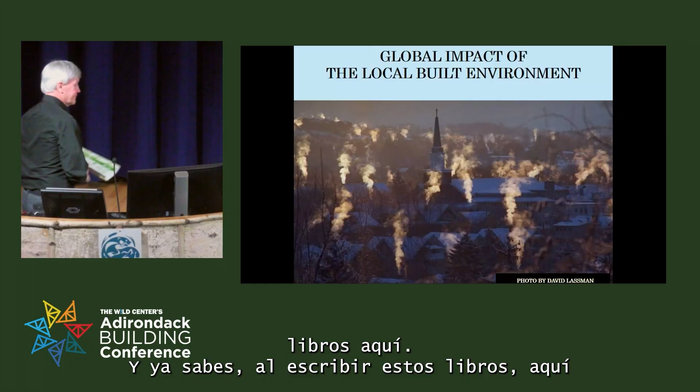So we're going to talk about these 2 books here, and they're contained right in these books. Here's the 2020 code. Here's the new one, the 2025 code, and it lives inside the book that Art's going to talk about later, in chapter 11.

So this is a picture of where our office sits up on top of this hill. If you look down here, if you think about it for a minute, our buildings really are alive, and they do create a lot of emissions, right? I think Chris just proved that when I looked at the slide up there, how many houses are still on either oil, gas, or in some cases coal, because there's a coal-fired power plant in the far back right of that picture.

So if you look at this and start thinking about what really happened five decades ago, it was a quiet marine biologist named Rachel Carson. When she published her book, she took on the chemical industry and parts of our government. Silent Spring, but she won. And that was the start of everything we need to know about energy right now.

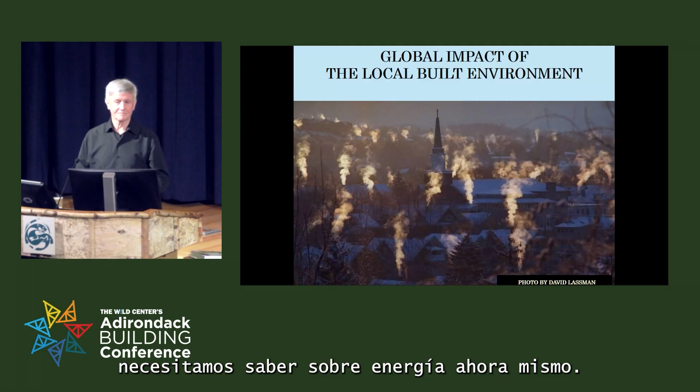And it actually was the first code, the energy code. Our first energy code was ASHRAE 1975, and it was created because of that war that got started way back then. So we fast forward and we're 50% better now. But our goal in New York State and the country right now in that glide path is actually zero by 2050, right? So this is getting pretty aggressive here.

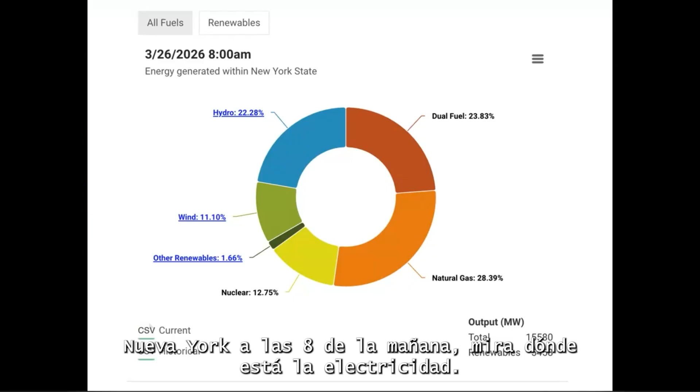This morning I went to the New York Independent System Operator's website, and this is the power mix where we're getting energy in New York State right now. This is all fuels in New York State as of 8 a.m. this morning. See where hydro is.

Hydro's been there for about, I would say, the last 20 years at about 20%. It was actually one of the big things when Andrew Cuomo would stand up and say we have the best renewable energy in the nation, but it was all because of the hydro, and we know where the hydro comes from, right?

Well, if you look at the renewable side, hydro's at 64%. Yesterday morning, it was 20% less than that. So you can see what the oil and gas prices are doing to us right now. We're coming to rely and pull more of our energy in New York State with basically hydro, and you can see where wind actually jumped up a lot.

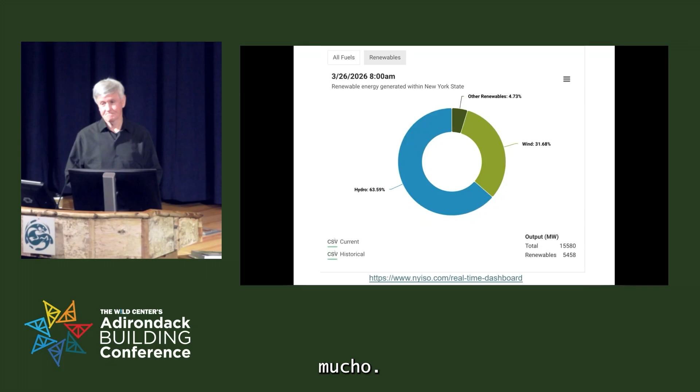That's strictly New York State. Well, we are getting hydro from - you guys know that the line's running down the Hudson River right now into New York City, right? That's in play. That's the power coming from Canada.

Good question. Geothermal, and I believe nuclear was already up there, right? Nuclear is in there. Yeah, there it is right there, 12.75.

So on December 16th of 2025, that's not that long ago, there was a unanimous vote that accepted the New York State Energy Plan as an all-of-the-above approach. So the New York Independent System Operator slide that I showed you is probably going to be what we're going to be seeing for quite a while now.

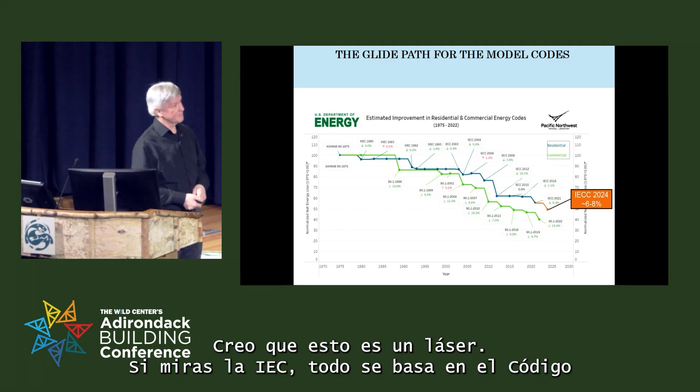This is the same slide that Chris showed, but I want to make important - I think this is a laser - you look at the IECC, it's all based on the International Energy Conservation Code of 2024. If you look at that, you can say, okay, we've only reduced our energy use in this code by 6 to 8%. Is that true?

And this is where we're starting to hear these things over and over again. But in New York State, we do things differently, right? Andrew Cuomo, again, way back in 2006, skipped to 2009.

We hit that code, and then we went right to the 2015 code. That was a 20% energy reduction in a simple code change. So where are we now? If you look at the graph, starting with the dark line, see the 2015 code to the 2018 code, and now we just adopted the 2024 code. So we skipped the code cycle of 2021. If you add those numbers together, we're much closer to about 17 to 19% energy reduction. That's where we are right here today.

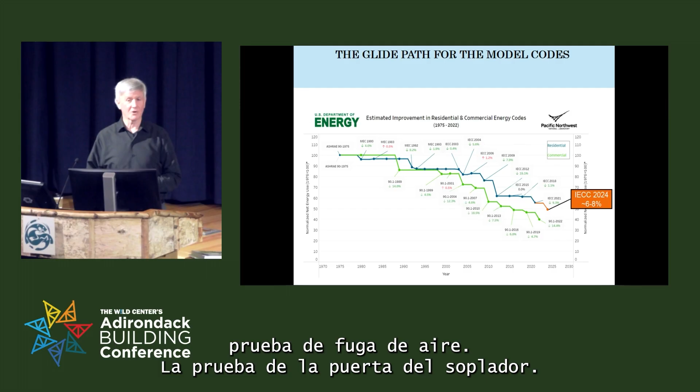And that's important. This is the first code cycle ever that's introduced two more performance tests. 2015 was the first ever code to introduce the air leakage test, the blower door test. How many are familiar with the blower door test in here? So everyone's doing them for your certificate of occupancy? Because it's required, right? It's mandatory, it's not should, it's shall.

All right, so when we start to look at these codes, we start to see what's really happening, right? There was no grace period, again, no transition period. We immediately went on December 31st of 2025. At that last hour of last year, any permit that was pulled after that had to go into the new code.

This is what the code books look like. It's a common misconception that everything is included in the code books and online, because it's not. The Uniform Code is actually contained in 19 NYCRR parts 1220 to 1227. And we need to know that, because it's really the prescriptive stuff embedded in the website that tells us a lot of stuff that the code books aren't telling us. It's telling us about not just what we have to do, but why we have to do it and how the code was created and what we need to follow.

And before you look at any code book or any online forums, you have to go to that website, because things change, right? When they make a decision to change something, maybe the code wasn't written properly or something else was different, or they decided to upgrade it or downgrade it, you have to go with what's going on right then and there, and match it up with when that permit was pulled.

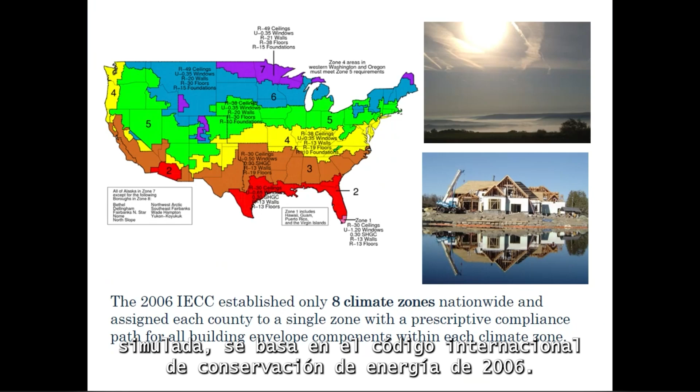So in 2006, that's an important date, because we're going to talk a little bit. We're 2 hours here, so I'm going to go back and forth on some of this stuff. But the referenced home that's buried in the code, whether it's the energy rating index or the simulated performance path, is based on 2006 International Energy Conservation Code. Because how do humidifiers work? They blow air across little bodies of water, right? In our furnace or our air handling systems. That's all they do. So what we decide to put into our homes for insulation, building envelope, and air leakage...

Air barriers are pretty different from when we build up on the top of a hill in Manlius, New York, or on the shores of Skaneateles Lake. Hygroscopic building materials are not good when you're sitting right next to the largest humidifier in New York State, right?

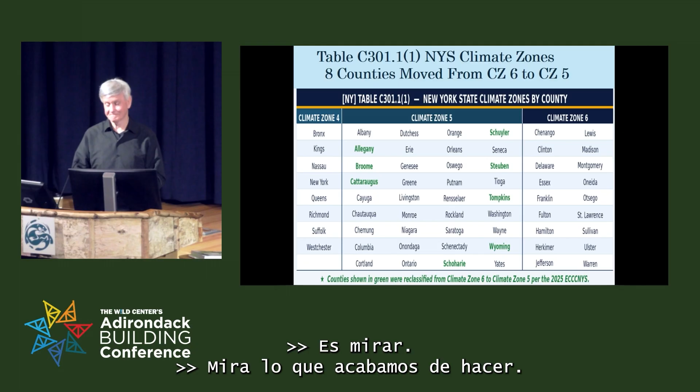So this is what New York State looks like. You know, the climate zones haven't changed that much, or have they? Because look what we just did. We just moved 8 counties out of Climate Zone 6 into Climate Zone 5. 8 different counties. And all that movement is based on heating degree days. Nothing else. That's all it measures. Heating degree days and cooling degree days. Imagine that. It has nothing to do about the wind loads that Art is going to talk about or anything else. We just slid 8 different counties into Climate Zone 5.

And that's going to get pretty important, because in Climate Zone 6 this year, it's the first time ever an HRV or an ERV is required.

If you're building in climate zone 6, you have to have a heat recovery ventilator or an energy recovery ventilator. And it has to be set to an ASHRAE standard, ASHRAE 62.2, 2018. And that's going to change. That's the standard referenced in the code book that will change outside of the code book, but it will not change until the code catches up to it.

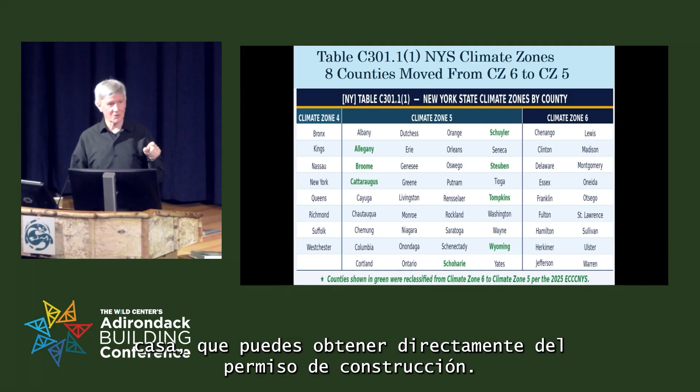That's important to know. When we talk about ASHRAE 62, it's a simple formula: 0.03 times the conditioned area of the home, which you can get right off the building permit, plus the number of bedrooms in the house plus 1. So what does all that mean? Why do they say number of bedrooms plus 1? It means the ASHRAE standard considers that 2 people are in the master bedroom and every other bedroom has 1 person in it.

This year alone, for the first time, the code cycle decided that 5,000 square feet was a big house. The code references ASHRAE 62.2, and there's a chart in the code book so you can look up the number of bedrooms and square footage, and it'll tell you how many CFMs you have to introduce. Mandatory introduce, not should, it's a shall. How often in these big 5,000 square foot houses do you see 6 people living in that house? How often are they actually in the house up here in the Adirondacks? Not often. So we have a code telling us what the air changes have to be, mechanically ventilated, based on a standard created 50 or 60 years ago, but it doesn't necessarily do justice to the house.

So I still work with a hammer, I don't work with a computer, so I'll be the first to tell you, our houses do not live inside computer models. They don't. And so when they start to underperform, this retro-commissioning that a lot of us do becomes critical, because you got to understand how the house is actually being used. It can't be based on a standard.

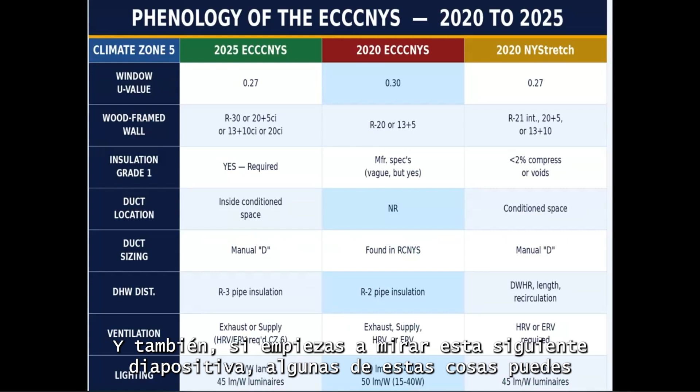And it also, if you start to look at this next slide here, some of this stuff you can get online, so it's not a big deal. But if you start to look at this, the 2024 International Energy Conservation Code really took everything from climate zone 6 and put it in climate zones 4, 5, and 6. It is the first time ever in a code that I'm aware of where a metric went down.

And what metric is that? Can you guys see it up there? It's a big one. It's the ceilings. R49 across all 3 climate zones in New York State. What it used to be?

R60, right? So what do you think happened there that the code that's supposed to be on a glide path to net zero just made that change?

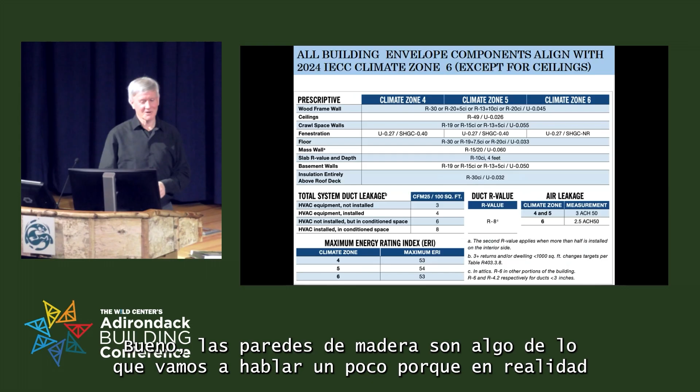Well, the wood framed walls are something we're going to talk about a little bit because it's actually wood framed walls and the windows are big things in the code. Josh and I get 2 to 3 calls a week on what are we going to do with the windows. We like to use Marvin Ultimate and they don't make a window that meets the intent of the code.

What do you do? Go to the ERI path. The backstop on the ERI path is like 0.4, not 0.27. You can get there if you start to manage and use the code to your benefit, right?

So the big thing here is that the R49, the reduction, was because the building scientists proved in a simple flow chart, XY axis, that after R49, the return on investment was 2 to 3%. The other thing you start seeing - we're going to talk a lot about duct leakage, because that's a massive change in the codes right now.

Okay, so here's the significant changes: framing and air barrier inspections. How many know what an air barrier is? Everyone knows what it is, right? Can you walk outside this building today to a new construction and identify the air barrier? Because I can't. I'm a builder and I put them in.

I'm also a HERS rater that have tested over 1,000 houses, probably thousands by now. And when I put an air leakage test in there and put my blower door in, that air barrier is not where it said it was on the print. Very rarely do I find it there.

Do you know where we get the most air leakage when we do our air leakage test with a blower door? We don't even have to do the forensics - the zonal pressure diagnostics where we can put a tube into the ceiling and find out if the attic space is connected to the house. Put it in the garage.

Where's your air barrier in the garage? Not Tyvek house wrap, right? It's the drywall, and it only has to be fire taped, right? And do we do as much air sealing in our garages as what we do in the rest of the house? Not even close, right?

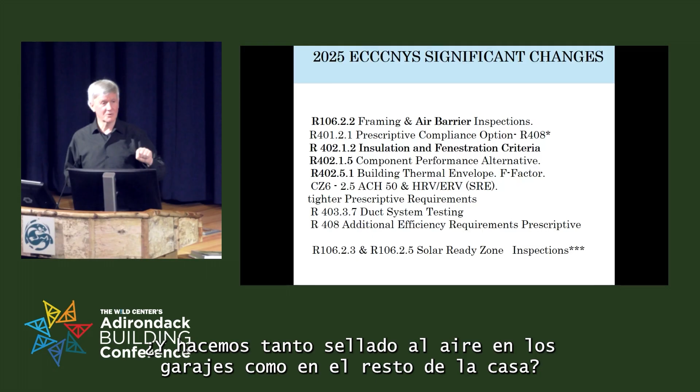And what do we put in our garages? Everything we don't want in the house, right? Cans of oil, cans of gas, our car, our lawnmower, old paint products, everything that's going to outgas with high VOCs that actually do react in the atmosphere and cause harm. Well, if the air barrier is broken in the garage, that's a bad thing. How do you inspect for an air barrier in a garage when all you got to look at is drywall?

You can't see around the base, where your mud sills hit your concrete blocks or concrete wall. So the next biggest area of leakage, it's not the ceiling, it's usually that perimeter of the base, where you have a wood product that hits a concrete product. Concrete doesn't move and the wood's moving, right?

We put this thin layer of foam down, and next thing you know, we're finding we're getting a lot of our air exchanged with exhaust-only ventilation. Or let's say someone turns a dryer on. Do you know a dryer exhausts 250 to 300 CFM per minute? That's a big exhaust every time we use our dryer.

We find that it comes underneath our decks, low to the ground. What do we find underneath our decks? Poor air quality. So the code is telling us that we have to do mechanical ventilation.

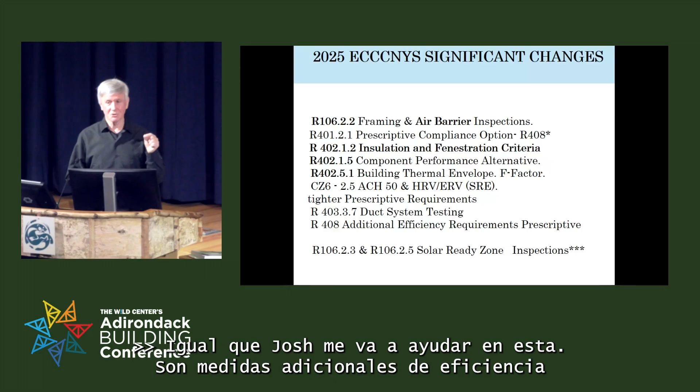Prescriptive compliance option - we're going to go into this one a lot, Josh is going to help me on this one. It's additional energy efficiency measures, brand new in the code. It's not on ResCheck - you have to manually enter and write it in on the ResCheck form and print it out. ResCheck can do a lot of things for us. And by the way, this code cycle came into play January 1st of 2026. ResCheck didn't even have a drop-down box till 3 weeks ago for the 2025 Energy Conservation Construction Code.

Who did those plan reviews? I have builders calling me up saying, hey, we checked the 2024 IECC and we got our permit. There's no way - they're not the same. They're not the same. But now we have the drop-down box, and there's a place for the architect or engineer, or whoever does the ResCheck for you, to write down those extra energy efficiency things.

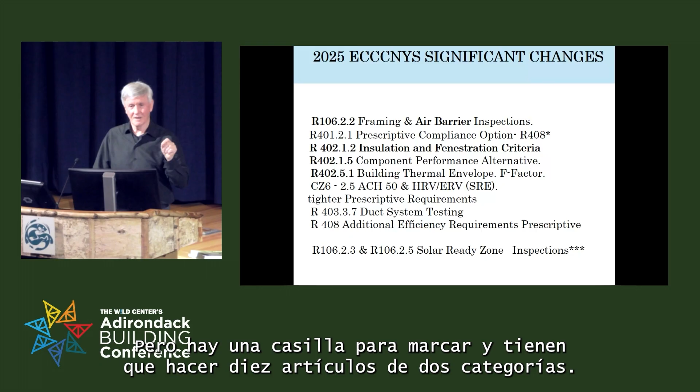But there's a checkbox for it, and they've got to do 10 items from 2 categories. And oh yeah, if your house is over 5,000 square feet, you've got to add 5 more energy efficiency points. So when you do that, think about it - if I was an architect, I'd come in at 4,999 square feet, right? Probably. It's a smart move for an architect to do that, to get his plans reviewed.

Insulation and fenestration criteria, that's changed - that's in the prescriptive part. The component performance alternative - imagine that, a brand new name in the code. How come? Why did they have to change the name in the code just to mess us all up? We thought we had it, right? We knew the charts, we knew our 402.1 and 1.3.

We knew it, but now they had to change it because for the first time in the code, they said - we always had a factor in there for concrete slabs, but it was always wrong. So now you have to include the F factor. That's the heat loss from the slab, and it's not just slabs on grade.

If you're going to use ResCheck, or the ERI path, or the simulated building performance path, or the prescriptive path, you have to account for the loss of heat in the slabs, because it's been proven over and over there's more heat loss there than you can imagine. There's a number you put in when it's less than 12 inches below the ground, like a walkout basement as it wraps around the house. If it's only 4 feet below grade, there's a correction factor, and if it's 8 feet below grade at the top of the house where the entry usually is, it's a different correction factor. The models do that for you, but if you're doing the prescriptive path a different way, you've got to do the math on that yourself.

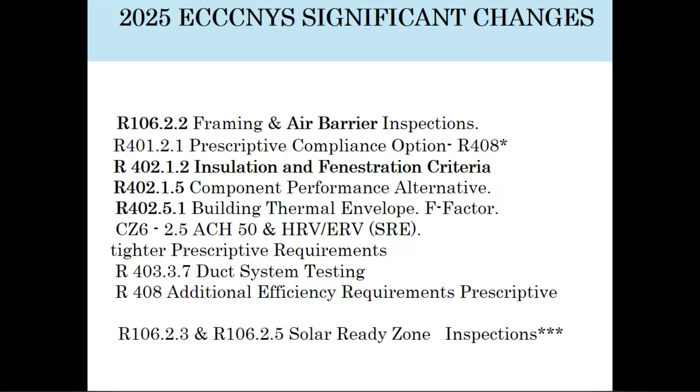But all those appendices were rooted out of the International Energy Conservation Code. There's like 7 of them that were built into the code, got passed, then on appeal were all taken out. What New York State and the 2024 IECC allowed is they put those appendices in the code book so that any state or municipality can yank them out and make them part of the code if they so choose. The only one New York State adopted was the RF one.

RF stands for residential fenestration, but the only reason it's there is because there's the chart for the F factor you have to use to put in your models. You have to measure the heat loss from your concrete slabs.

So here's the 3 pathways. This is actually on the exam when you take a plan reviewer test with ICC or whatever. There's 3 pathways for compliance. R401.2.1 prescriptive compliance option. There's 3 ways you can do it.

It's simple prescriptive. You have the U factor chart there, and the U factor for your assemblies and for your fenestration. You just do all that. You pass the code. Simply prescriptive.

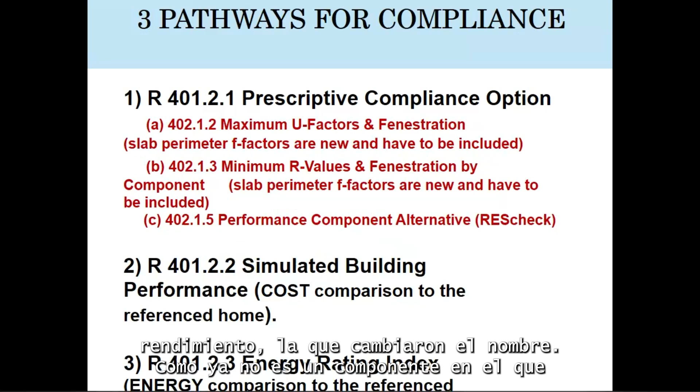There's section B there, minimum R values and fenestration by component. Same thing, all prescriptive. And C, the performance component alternative, the one they changed the name of, because no longer is it a component. They threw the F factor in, which is not a U value. They're not even close to being the same. You measure heat loss from a slab completely different than you measure through the glass or through a piece of insulation.

So if you start to think about this, they couldn't say it was a component, so they had to change it. They had to change the UA approach to the component alternative. And that's what's now in ResCheck. That's usually the most often used compliance path.

Then you have the simulated building performance. All it's doing is comparing the energy cost based on the reference home that lives inside a computer. And if you're better than what they are by a certain percentage, it's like 20%. So here you go.

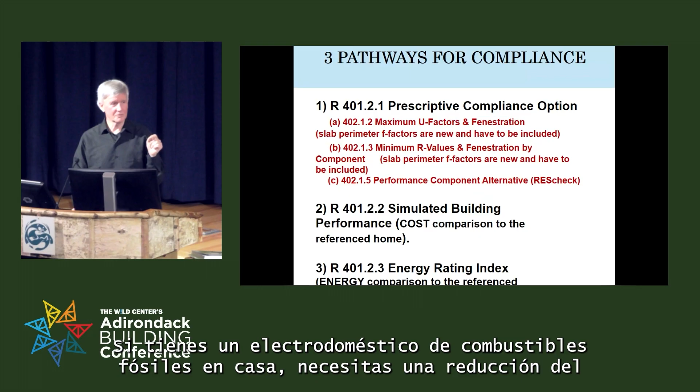Here's the code sneaking in electrification. If you have a fossil fuel appliance in your house, you have to have a 20% reduction. If you're all electric, let's say air source heat pumps or geothermal, it's only a 15% reduction. So they're sneaking it in probably about 5 or 6 places here that unless you read this code book quite a bit, you don't even know it exists, but it does exist.

So the simulated performance doesn't include lighting. It only includes your heating, cooling, and ventilating. That's all the costs they're measuring right now. And if you can beat that, you got it.

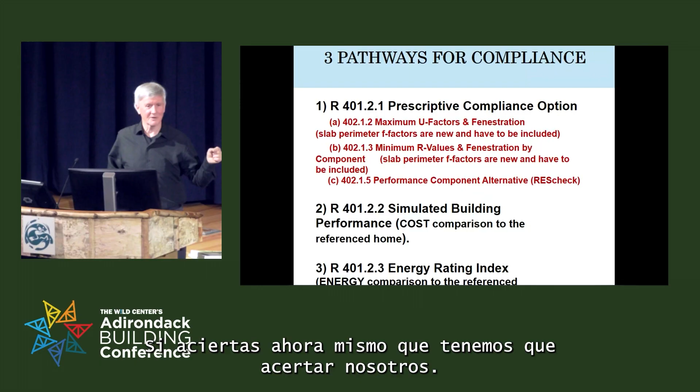I would say the most often one that is not used now is the energy rating index. We should have been using this for the past 20 years because 45L was that federal tax credit that gave you $2,000 if you hit the mark we have to hit right now. Builders didn't want to do it because you had to do all the other testing.

You had to do the air leakage test. Well, with the 2025 code, you've got to do the air leakage test. You had to do the duct leakage test. Well, 2025 code, you've got to do the duct leakage test. You had to do the mechanical ventilation test. Well, 2025 code, you've got to do the mechanical ventilation test.

We're there. The 45L tax credit sunsets in 3 months. It was a $2,000 federal tax credit. I have a friend in Wisconsin I used to go to a lot of these HERS Rater conferences with. He built 40 houses a year.

The tax credit, not a deduction, right? If he had a tax bill at the end of the year of $100,000, 40 houses times $2,000 is $80,000. He only owed $20,000. And still builders didn't do it because they didn't want to pay the cost for a HERS Rater.

Where'd that guy go? There he is back there. I can't impress enough that my son Josh is sitting here. He's building on Cazenovia Lake, a high-end house on Cazenovia Lake.

He calls in for an insulation inspection. He doesn't get a call back for 3 or 4 days. He wants to get the drywall up. Time is money - you've got a drywaller scheduled, you better use them, right? He hasn't even gotten a call back yet, so maybe he'll get an insulation inspection next week, right?

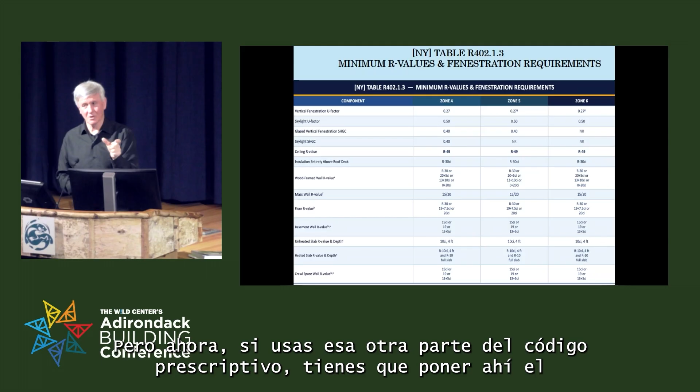Because in climate zone 5, we do have a solar heat gain coefficient of 0.40. So now you're talking to the window manufacturers that prescriptively say, I don't have a window, my highest end window, I'm just going to use Marvin Ultimate because I get more calls about that than anyone else, that meets the 0.27. But now, if you use that other part of the prescriptive code, you got to put the solar heat gain coefficient in there.

And for everyone who knows about windows, the solar heat gain coefficient and the U value change with each other, right? When you start lowering the U value, you're raising the solar heat gain coefficient. Simple physics.

Wood frame walls. You know, we got, you guys can read it across, R30 in climate zone 4. If we sneak over, they're all the same. Right across the board, climate zone 4, 5, and 6. How do we do that?

How do we get an R30 in a wall assembly that's, say, a 2x6 wall assembly? Can't do that. Can we do 20 plus 5 continuous? And continuous insulation on the exterior or the inside means continuous. It doesn't mean that you can put something between the foam or whatever you're going to put out there. It's got to cross all framing members, right?

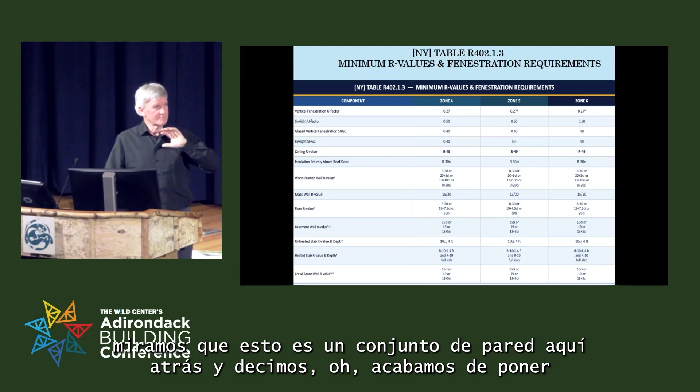So that is the biggest benefit for the buck, because if you take a wall assembly, and I'll show you this a little bit later, reality, if we look at, let's say this is a wall assembly back here, and we say, oh, we just put R20 in the cavities, is that an R20 wall? Not even close. If it's 2x6, 24 inches on center, it has a framing factor of 23%.

2x6 studs are only 3.5, has an R value of 3.5. The cavity might have an R20, but the studs don't, the plates don't, the headers don't, the mud sill doesn't, the box sill doesn't, right?

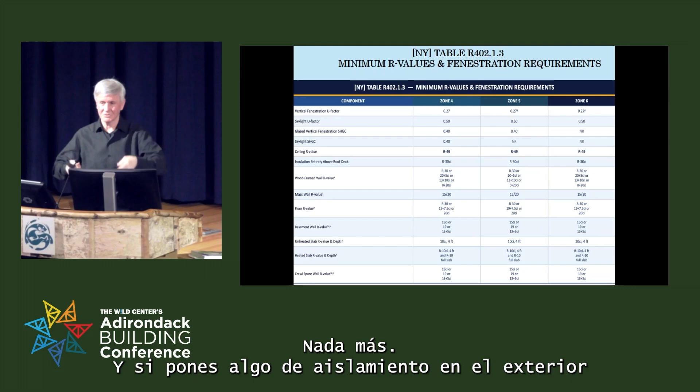So most of the computer-generated models take that into consideration when you use the, used to be the UA, total UA result, now it's called the component. So they're measuring just thermal conduction, nothing else. And if you put some insulation on the outside of these buildings, you just knock that thermal conduction down.

You can pretty much start to play with the intricacies inside the models so you can get a wall assembly that you can actually build. Because we know as builders, right, when you start to change the thickness of the wall assemblies, what happened?

It's no longer 4 9/16 or 6 9/16 extension jambs. Now you're asking a window manufacturer or a door manufacturer to come up with something special. And when they come up with something special for you, what happens? It costs more. Not only does it cost more, it takes longer for you to get that product to your job site, right?

And when you start putting doors on thicker walls, and you have a single swing door, and you mount it outboard, where everyone does, and the homeowner calls you up and says, hey Kevin, I can only open my door like 120 to 130 degrees, because what does it do? It hits the inside corner of that wall, right? You think they're happy?

Because when the movers come, and generally they can get the door back at 90 degrees and it cocks out, you're not going to fit that couch or that master bedroom suite or that washer or dryer through that door unless you've actually planned for it, or they got to take it off. So when we start to screw around with wall thicknesses, there's a lot of unintended consequences, right?

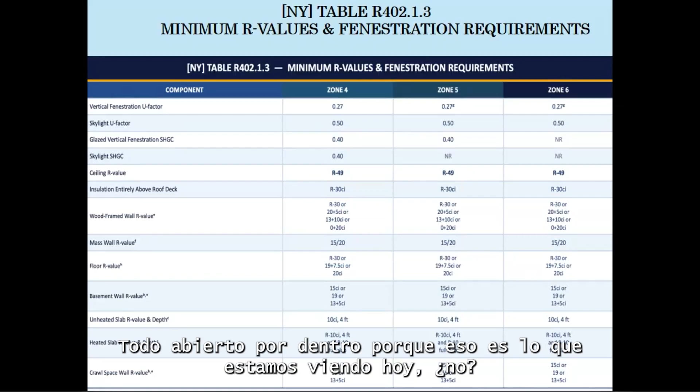And our walls, the exterior walls - let's say we take any size house, but let's say a 5,000 square foot house that has everything open on the inside, because that's what we're seeing today, right? The kitchens are open to the dining areas, the dining area opens to the gathering area, the living room. Where are we putting our supplies? The heating contractors are showing up and say, what do you want me to do here, Kevin? I'm not using ductless mini splits. I got to duct something, even if it's an ERV or my range vent and or my ventilation stuff. Where are we going to put it?

So the code has allowed a way to put the supplies, not returns, but the supplies, by building your wall out a certain way so the air barrier is between you, that duct, and the outside, and the insulation has to be a certain percentage of that wall. You can still play around with it in REScheck, right? Because you can actually qualify that one little section of wall at a different U value than all the other assemblies, and you still get it to pass. But the code right now is saying air barrier and a certain requirement for insulation, and then you can put that duct in the wall. Generally, it's got to be an oval duct for it to fit inside the space that's left in that wall assembly.

Slabs, I mean, here you go - that's a big change, right? You put a heated slab in it, it's R10 throughout the entire slab. Slab edge down 4 feet, the entire underside of that concrete has to be an R10, right? That's mandatory. It doesn't matter if you do ERI path, simulated performance path, or prescriptive path - that's a backstop, you can't take that one away. So the heated slab has a different condition than the unheated slab, but we're still at R10 continuous 4 feet down. And again, there is a description of what continuous insulation means.

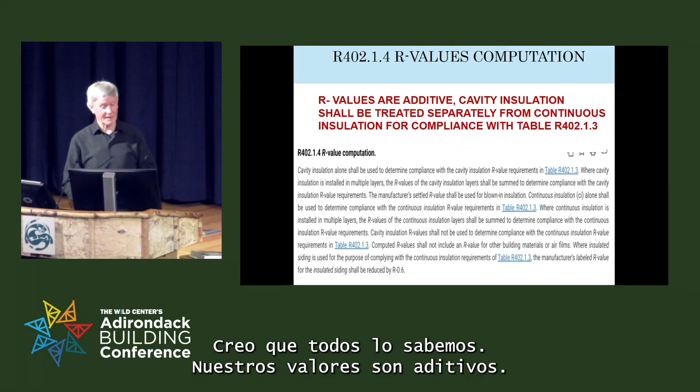I think we all know this: R values are additive. You can add R values together and come up with this R value of the assembly, right? You can do that, but you can't treat it the same as a continuous insulation. It has to be different to comply with that table.

So when you get U values, I think the difference between an R value and a U value, I'll go into this a little bit later. U values include what an R value doesn't include. You take the U value of a wall assembly, it includes the air film on the outside of that wall, it includes the sheathing, it includes the insulation - the R value that you just took the inverse of to get the U value - it includes the drywall, it includes whatever other finishes on that wall, and it includes the inside air film. That's what the U value includes. R value does not. R value is whatever's stamped on that product you put in the wall, that's the only thing you can say it is, nothing else. And the code says when you put your insulation in the wall, it has to have that stamp on it.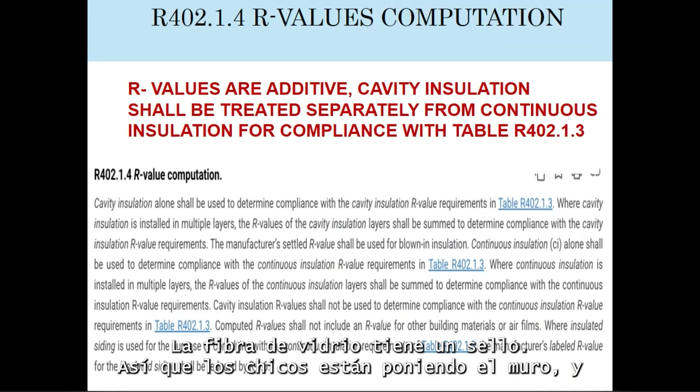Even the friction fit fiberglass has a stamp on it. So the guys that are putting in the wall have to put that batt in so you get to see that stamp. Whether it's an R13, R19, R20, R21, R25, or an R30, you got to see that stamp.

A new name, I went over it - it's because of the exposed slab. Let me see if there's anything else in here I missed. I don't think so. This is the formula behind it, and you're welcome to do that formula, but we have a chart - that's the appendix in RF. The appendix in RF has 3 charts. There's so many charts in there I couldn't put into my PowerPoint presentation because they're so long and so small.

And I think for climate zone 5, the F factor for a slab is 0.44, and if it's a heated slab, it's 0.55. So there's another one of those things that doesn't make sense when you think about it, because remember, the higher the U value, the less good it is, right? So U values go to - lower the U value, the better. The higher the R value, the better, right? So they're the inverse of each other.

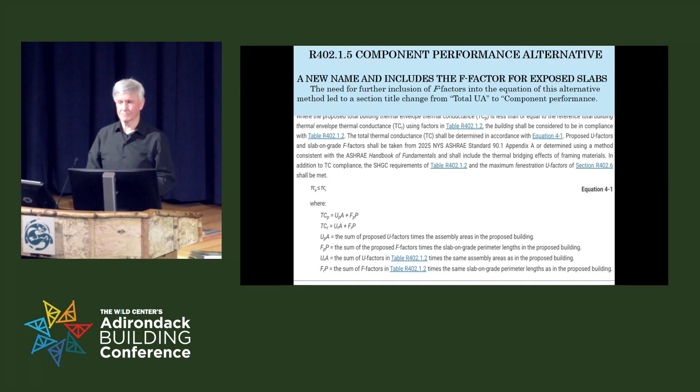Goes away. Goes away. What about the concrete itself? As opposed to stone? Goes away. The only thing you got to do is meet the intent of the code for the foundation wall.

R10 continuous. Thermal mass, and the F factor goes. You're just taking... but you still have to treat the wall, whether it's inside or outside.

Component performance alternative, new name again. It's the same thing, but you're starting to see how things come together here. These are the specifications, this is an example building, and when you get this in a computer-generated model, if you get all the way down to the bottom, it'll say 'passes' because the total thermal conductance is less than or equal to the total thermal conductance of the reference home, and that reference home lives back in 2006.

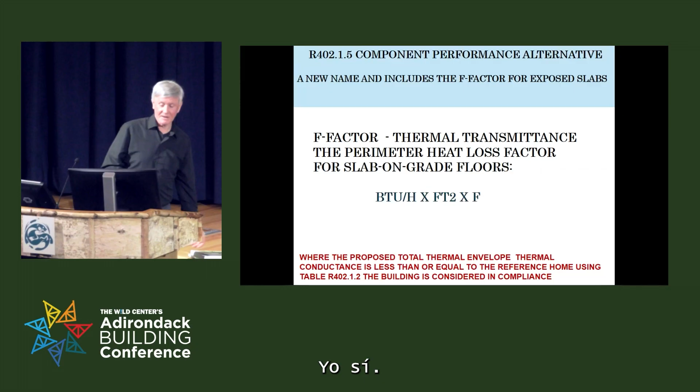F factor, thermal transmittance of the perimeter, the heat loss factor. I went through that, but there's the formula: BTUs per hour times the square foot times the F factor. F factor is in a chart, and it was actually first described in ASHRAE 90.1.

2010, but was finally recognized in the residential world. That F factor has been, I think it came in all because of a free download you can get, called Therm. Therm can measure the heat loss in concrete slabs, and it will show you that it's actually substantial. I just came from Boston at another conference, and people are refuting this now, so who knows.

Code cycle is only 3 years, right? For some reason, New York State likes to take 5, and that's why we're getting these massive energy reductions all at once. So we actually suffer because of it. Let's be clear, if they're going to gradually start to reduce the code and keep us on that glide path, it's not bad.

That chart I had, and Chris had, 7 to 8%, yeah, we can do that. But when it gets to be 17 to 20%, we're using different materials, designing our houses differently, and installing them differently. So it does make it harder on builders.

REScheck, right? This is it. It's got the 2025 drop down in it. It also has, and for you code officers, I'm sure you know this, but if you don't, it has a checklist you can print out. So when you go to the job site, you should have that checklist with you and just check those boxes, and you got it. Or you hand that checklist to a HERS rater or someone you approved to do the ERI path.

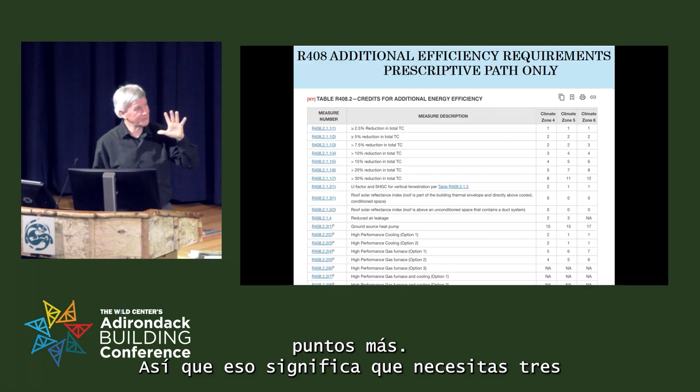Glass options are in there, but you can see down at the bottom where the gas furnace options are, they're not available because you cannot mess around with appliance standards. They're protected by the federal government. Whatever the federal government says the standard is for that forced air furnace, you can't make it any more efficient. You can't say it in the code. You can do it, but you can't say it in the code.

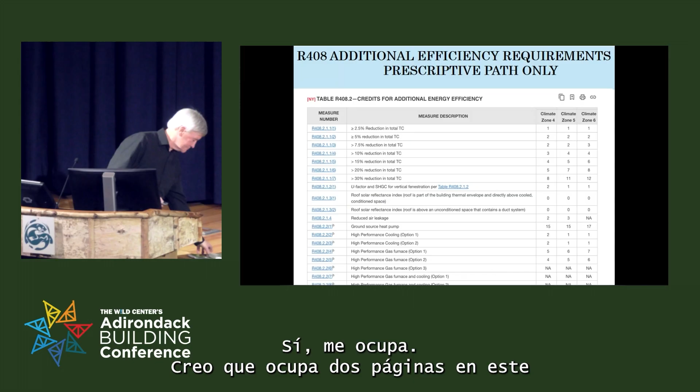Yeah, there's a bunch of other stuff. It takes up about 2 pages in this book. But for brevity here, that's it.

So here in writing is what it says in the code book, which is what I'm saying, right? R408 is actually down inside the code book, more towards the end. You got to go looking for it.

So here's a house that was the first LEED certified home in New York State, or the Northeast, I can't remember, that we built back in 2004. We were looking to reduce things. The biggest thing back then when we were preaching about green building being better, people would say no, it's not. So back to the people asking, does it cost more to build green buildings? Everyone out there says it does. Well, I said it depends.

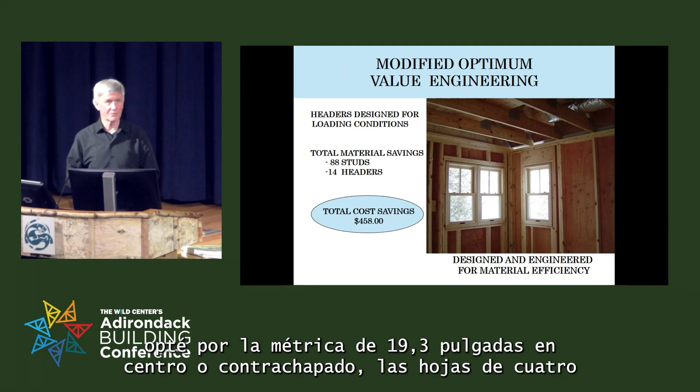Because if you reduce the thermal conduction by only putting headers in where they actually have to carry a load, you go to, in this case, 19.3 inch on center—plywood 4x8 sheets still work, right? So I took out 88 studs, 14 headers. I'm showing this picture because the window on the right is half the size of the window on the left, but it's taking the roof load, right? It's got 2 trusses sitting on it.

The one on the left is a gable end. There's no weight on it at all. You don't even need a header there—all you need is something to nail your trim to. That's it, there's no weight there. The truss takes that load. So we took out 88 studs, 14 headers, and I saved $458. Again, this is back in 2004.

Go to your framing contractor and say, hey, that's a lot less work. You know what they say to you? This is different, I got to use a different ruler or whatever. So they don't give you any credit on it. But there's the studs that I took out, because people can't see it unless you show it to them a different way.

That's over 100 square feet of R3.5 I took out of that wall assembly. And what did I put in its place? R20, right? That's a big boost.

Interesting thing about this one - you guys know in the trades, the insulation contractors, at least back our way, they just count sheets of plywood, come up with their number, bid the job. Well, I got 100 square feet of insulation for free because he didn't catch it. He never caught it until he came to one of my presentations and saw me show that slide, and then he started to change his bids a little bit. But that's what it looks like.

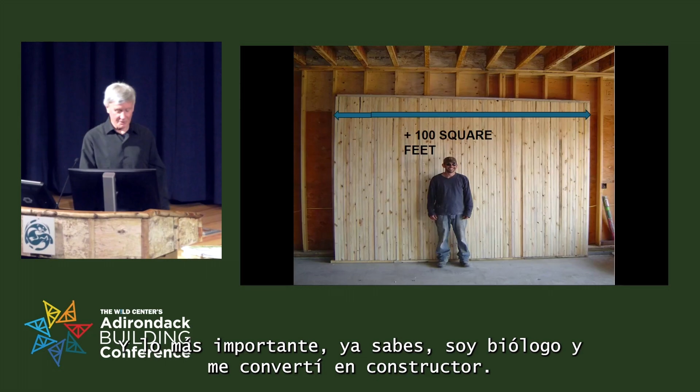The bigger thing - I'm a biologist who became a builder, so this is important to me. In 2004, there were 1.9 million housing starts. When Emerson talks about the housing crash back then and what really happened, we went from 1.9 million housing starts in the U.S. to 86,000. That's more than a crash, right? But if you take that 1.9 million, I actually did the board footage calculation on this, and the 14 headers...

They have over 30,000 acres of forest preserved each year, and what do the forests do today? Everyone says plant trees because they're actually recycling carbon dioxide for free. They breathe in the carbon dioxide, split the carbon away from the oxygen, put all the carbons together on a chain, and put the oxygen back out in the atmosphere for us to breathe - keeping the 21% oxygen in there so we can stay alive. And what do the long carbon chains give us? You're seeing it right now in the trees - days are warm, nights are cold, the maple sap starts, it's the sugars and starches giving it to us for free. So planting trees does make a difference.

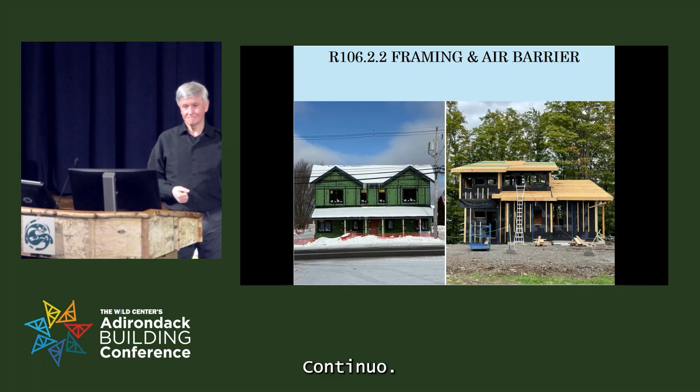Four inches of wood fiber insulation on the outboard, continuous - a vapor open assembly. Let's start thinking about what's going on with our buildings today. We start to say vapor open or vapor close. We just moved 8 counties out of climate zone 6 down to climate zone 5 based on heating degree days alone.

Nothing else - what about torrential rainstorms? What about everyone going to put air source heat pumps or geothermal systems into their house? If you have an air source heat pump on your house and it's 80 degrees, you think they're not going to turn it on? People who never had air conditioning before, of course they're going to turn it on because you've got cooling and heating in one unit. It has a COP of somewhere between 2.8 and 3.5 - so every bit of energy you put into an air source heat pump, you're getting back out anywhere from 2.8 to 3.5 times that energy, just by taking the heat and cool from the air.

But when we do that, when we air condition our houses, where should our vapor barrier be? Let's say it's 3 months, a month each side on the shoulder seasons when it's on - because you go down south to hot, humid climates, where's their vapor barrier? We're warm-in-the-winter side up here - it's the code, it tells you you've got to do this. So what's happening? 5 months, maybe 4, maybe only 3 up here, but down where I'm at, it's 5 or 6 months. Our vapor barrier is on the wrong side of that assembly.

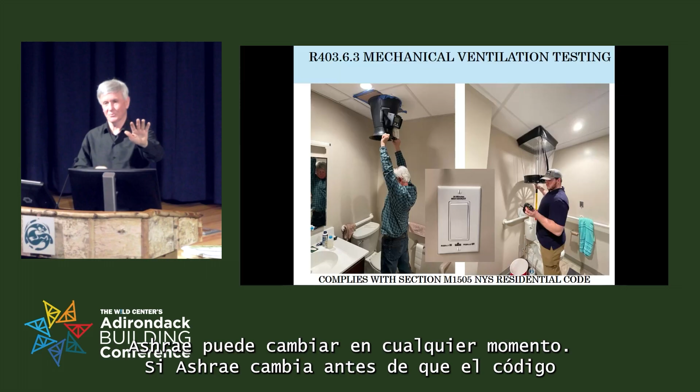Oh, here you go, code officers—mandatory, shall: you've got to test the mechanical ventilation. It's got to meet ASHRAE 62.2, or it's got to hit that chart on page 97 of the code book. And the only reason the code officials gave you a chart is because the code cycles every 3 years, while ASHRAE can change anytime. If ASHRAE changes before the code changes, you've got a mismatch.

So there's a chart inside that book that you can go across to the square footage, and across to the number of bedrooms. Remember, it's the number of bedrooms plus 1 for ASHRAE 62.2. For whatever reason, there's always 2 people in the master bedroom and a person in every bedroom in the house, right? So I would use the chart.

Make sure you're there, and I would always check the technical bulletins released by the Department of State. Always check them before you do your plan review. Get the newest and best things out.

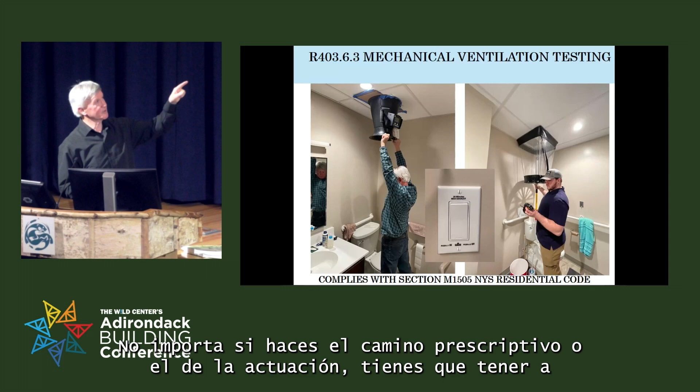And you got to have a timer. You got to have it. It's in the code now. It's mandatory, doesn't matter if you do the prescriptive path or performance path. You got to have someone come in with a piece of equipment. The piece of equipment on the right is $5,000, and you got to be certified to use it.

It's wireless. The guy on the left is me, that's a cheaper one. It's still $1,700 and you still need to know how to use it. Most people don't. It's not just hold it up there and read it, and it's got to get calibrated every year. So you got to pay the $1,700 and get it calibrated every year, or whatever the manufacturer tells you, right?

And that goes with all the blower doors. You got to check the fan, put a ruler across it, you got to calibrate your manometers, and if you can't calibrate, you got to send it out. I just sent mine away. It cost me $570 for a DG1000 and DG700. I sent it back to the Energy Conservatory because I wanted to make sure mine got calibrated right.

And I had 3 calls from other raters already asking, can I use your manometer to calibrate mine? You're allowed to do that, but unless they put it in the lab, you really don't know, right? So you have to do this.

Is a code official, do you own one of these? How many code officials in the room? Brian's back there, right? Do you have a manometer to test this? There's no way. Can your municipality afford to buy you this and train you on it? Not going to happen, right? Who's going to do it?

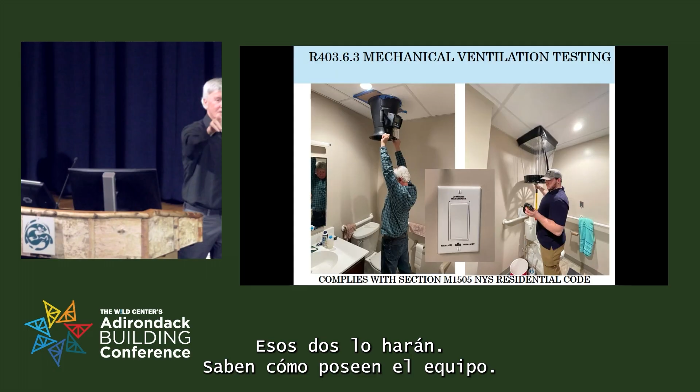We're back to these guys in the back room. Those 2 guys will do it. They know how, they own the equipment. They're paying the $1,700 for that. They're going to come in and measure it. Because they're third party, you can rely on those results. They're not going to fake them. They're going to go in and do that work for you.

They're not just going to say, oh, the fan motor number on the model says you're exhausting 70 CFMs. You can't do that anymore. You got to test. Mechanical ventilation has to test. That's in the code.

I'm glad you brought that up, Art, because Monday morning, get this—this is a little bit of a broken system, right? I did a house over a year ago, and I put it in for Energy Star for a LMI builder, low to medium income. So I did it as a freebie, thinking I'm helping them out. It took me like 7 trips. So I've got 7 trips, and that changed my hourly rate. I got a lot of money into it. Plus I have all the equipment. Plus I did all the computer generated models for them.

I put it in, and it triggered like 1% in-person QA. There's somebody flying in from the Midwest to meet me Monday morning to test my house, and this guy has 3 years experience, and then he's going to fly down to Florida, and I have to pay for those flights for my QA. And if I'm wrong on that house, yeah, it's another bad moment, right?

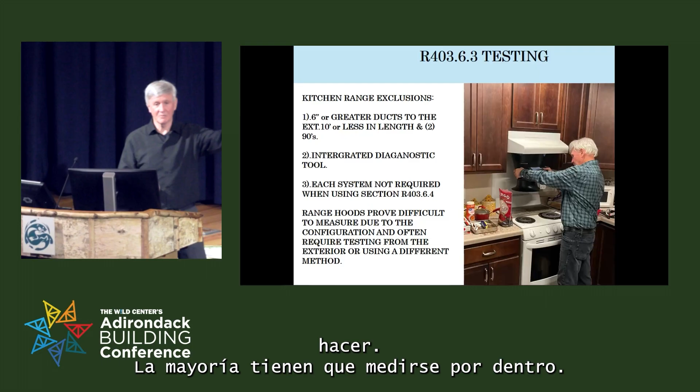So it's hard, it's not easy to do this. They actually make a fitting that fits that exhaust fan, because if you're on the 5th floor, you can't go outside and measure from the outside. You can do it maybe on floors 1 and 2 at the exhaust vent, which we're allowed to do. Most of them have to be measured on the inside. This is in the code right now today. As of the 1st of this year, we have to measure the mechanical exhaust and the range exhaust, and it has to hit a number.

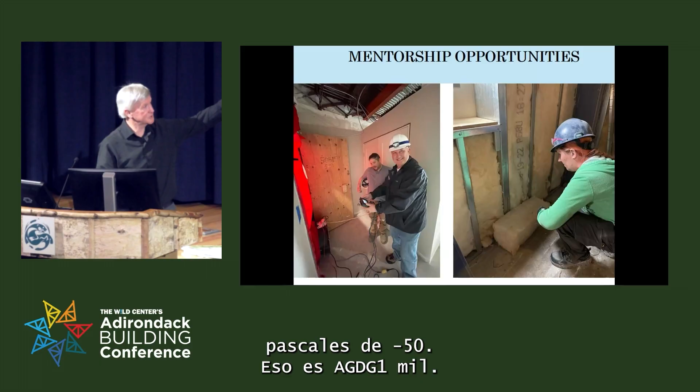This is actually one of my favorites. Same project - that's the code officer for the city of Rome, and he came with me to every single unit. If there were 79 or 83 units, he came to every single one. He said, 'Kevin, I want to know about this air leakage stuff.' So the code officer for the city of Rome understands what an air leakage test is - we're not just depressurizing to minus 50 pascals, that's a DG 1000. So he knows what he's doing. He went around and felt it, and I gave him my smoke pencil, so he knows where the leakage is and when it's coming from a bad spot. He knows how to interpret what the 3 ACH50 number really means.

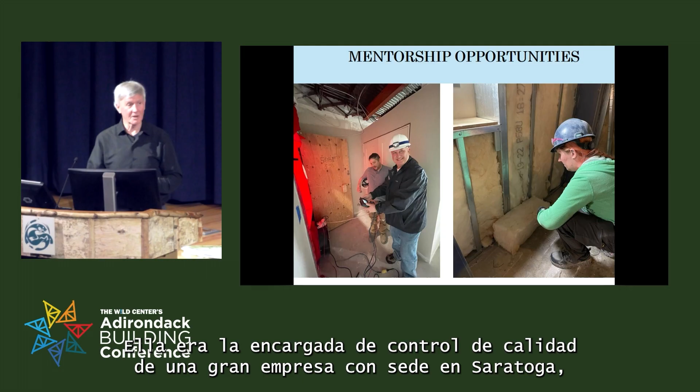And the woman on the right - single mom of 2 young kids, lowest paid person on the project - was putting insulation in all day long. I went up to her one day and said, 'What you do has an impact on your kids. You're probably the most important person on this project.' When you empower someone like that, she became so critical about how she was putting fiberglass batts in that within 3 months she was a supervisor of the installation crew. She didn't have to physically put it in anymore - she became the QA for a large company based down in Saratoga, I believe. She knew that getting itchy all day actually makes a difference - a big difference.

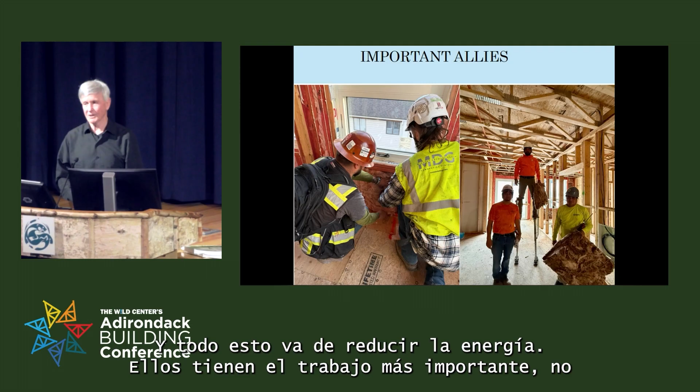So there are mentorship opportunities and allies. The big job I'm talking about in Syracuse has 350 people on that job site every single day. I think we're making them better at their jobs by telling them how important they are - not just here in Central New York at Syracuse University's campus, but at their next job in Colorado. If we can just tell them how important their job is, the better they do the insulation, the more energy the house is going to save from now until its entire life - and this is all about energy reduction. They have the most important job, not the architects, not the engineers. Everything that breaks in our houses today, I'd say 90% of it isn't the technology or the product, that's just physical - it's us, it's the installers. We do it wrong. We need to incentivize these people to do it right, because if they do it right, the energy models actually do work.

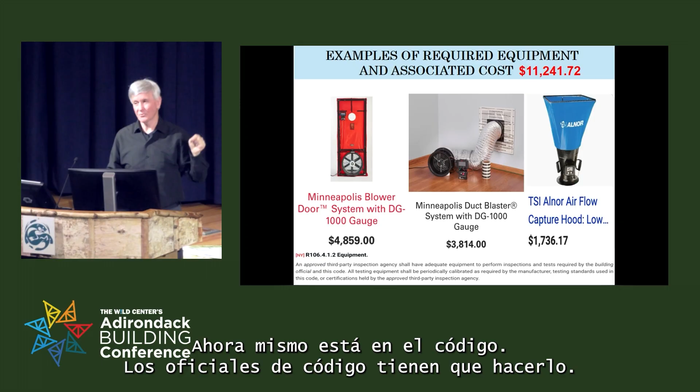Here's the equipment. Every code officer has to have this unless they designate a third party - these guys in the back. And this is what it costs: a blower door kit, you might as well say it's $5,000 by the time you get it here. A duct blaster, $4,000 - the cheapest one you can get, unless you use anemometers, but they're not accurate. So you've got $12,000 worth of tools, $6,000 of which you never had to have before. It's in the code right now - code officers have to do it. If you don't want to do it, you better hire someone who does, and they better know what they're doing and calibrate their manometers and equipment. Every year you've got to get this stuff tested, and a duct blaster test is not an easy thing to do.

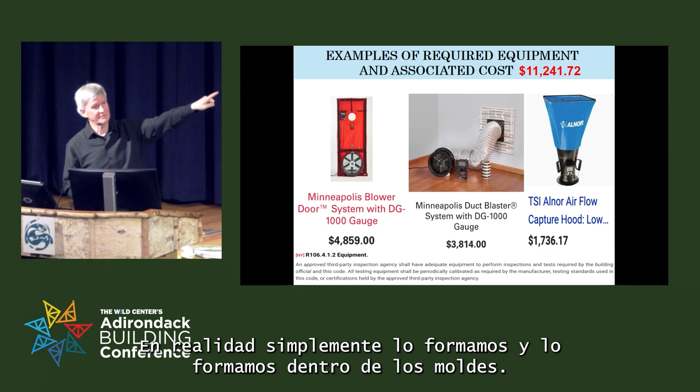Fenestration criteria: U factors and solar heat gain coefficient. What does solar heat gain coefficient mean? In this case, if you have a solar heat gain coefficient of 0.71, it means 0.71 of that long wave radiation makes it through that window. That's all it means, that's all it measures.

Low-E coating up here - when we had COVID, and before that when the housing bubble burst and the financial world was in trouble, we were getting Energy Star windows. The builder was saying, yeah, I got an Energy Star window, it's stamped right there. Well, they never looked at the lower part to see it was an Energy Star window for southern climates. We were getting windows over COVID that were turned around.

Had the emissivity coating on the wrong surface. Up here, where do we want it on our surface? It goes like this: outside, inside. Surface 1, 2, 3, 4.

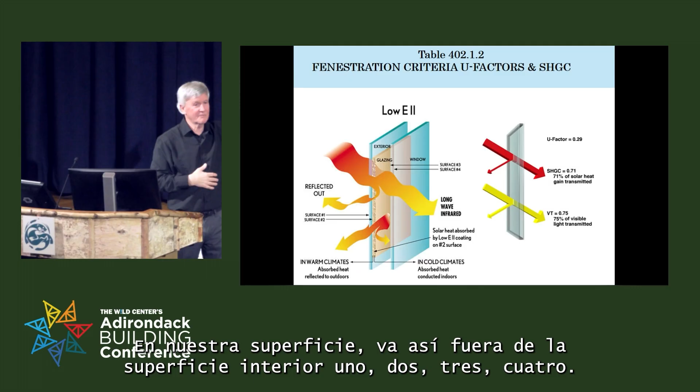We get to tell our window manufacturers - Cardinal Glass up in Canada makes like 75% of the glass for the entire country. You can tell them what you want, you're going to wait a lot longer, but you can tell them where you want that emissivity coating placed. In the commercial world, it's on the outside. In the residential world, it's always inside the glass because it's a soft coat - if little kids come up and scratch it, you're going to impact the coating. So it's always on surface 2 or 3.

Let me see if I can get this going.

Here was one of the biggest projects we worked on that had passive house windows installed - watching the lower left corner of the operable window. Ooh, right there, you see it?

Yeah, it's good. This place wasn't even to a point where the EIFS was finished yet, and they had so much condensation on the windows it filled the sill - an inch of water. So we got called in with guys like Terry Brennan trying to figure out what's going on here and how we're going to fix this.

Well, what was happening with the window? Well, this is a COVID job. Play it again - look at the lower left corner of the operable window. You can't find this stuff unless... yeah, it's good.

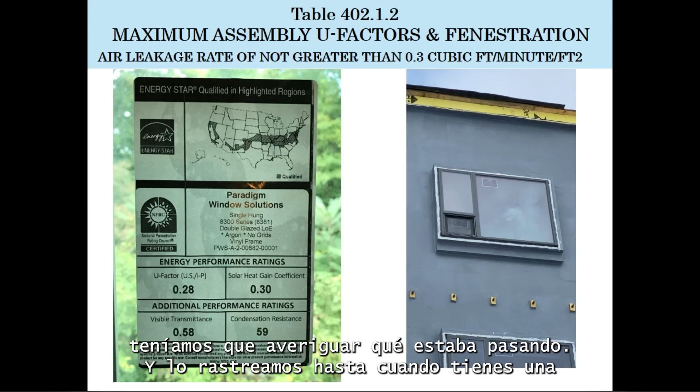What did they care about? Callbacks - people complaining, I have condensation on my window. It's out there now, and this is what we get to look at.

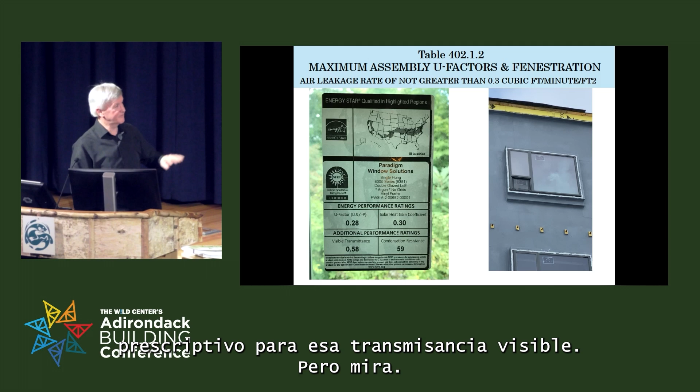We've got the U factor, 0.28 - oh, prescriptive, doesn't meet the code. Performance, sure it does. Solar heat gain coefficient of 0.3, right? We know climate zone 4 and climate zone 5 have a prescriptive value for that. Visible transmittance, but oh, look, bottom right corner - condensation resistance, someone says condensation potential.

So that sticker is critical, and it's the only accepted standard out there. If you don't see an NFRC sticker, you've got to go to the code book and take the default, and the defaults are very, very tough.

Okay, this is an old one in the code, but it gets to be more critical now because of what the prescriptive measures have changed with ceiling insulation. I'm going to read this: the design does not allow for a prescriptive R value, or whatever that computer model generated, you can actually go down to the next level.

So if you're doing the prescriptives, let's say you're in REScheck and it says you have an R49. If you have an area like this, you can reduce it as long as that insulation goes out the entire area of that top plate and hits the outside uncompressed, you can reduce it. If it gets compressed, and you don't have an energy truss or a raised heel truss, you can't do that.

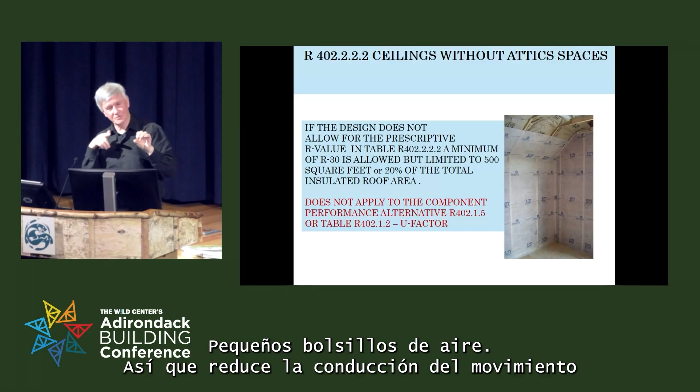But if it's uncompressed - because the minute you compress insulation, you reduce the R value. Every insulation product out there today works by one simple thing: it captures air spaces. Fiberglass has fibers woven together that create little air spaces. Spray foam, same thing, little pockets of air. So it reduces the conduction of heat movement across the surface. Heat only moves three ways, and if you take conduction out, that's the biggest one. That's your hand touching a hot pot and it burns, that's conduction. Radiation is when you stand with your face in the sun and you're warm and your back is cold, or you're standing in front of a fire. And then there's convection, so it can move by convection across those little tiny holes. But if you stop the conduction, you're doing something good.

So you're only allowed to do this for 500 square feet or 20% of the total insulated roof area. I don't know what code officer is going to go out there and start measuring and doing the math on that - code commentary actually says you can have an informed guess by looking at the area. If design does not allow, this does not apply to the component performance path. You can't use this in the U value calculation - remember, U value is computed differently than the R value. So it can only be used in one of those drop-downs on the prescriptive side.

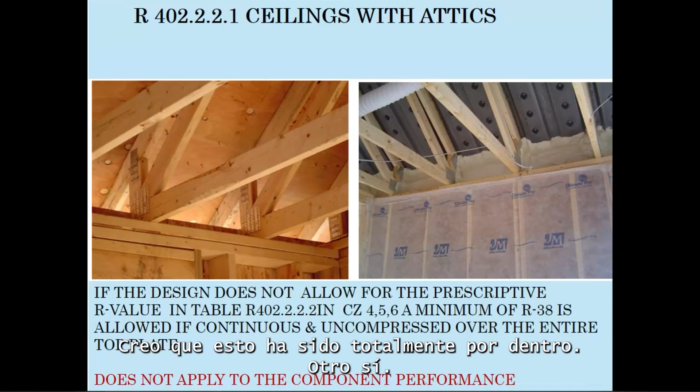And even, you got to do the 3 ACH50 in a townhome too - single family, 2 family, 3 stories or less, you got to do it. And you go in there and the builder always says, I hear it over and over again, well, no one told me I had to air seal between units. So when we put the blower door in one unit, we're measuring the air of the other unit too, because they're not air sealing. That's critical, it has to be done.

You can also see, if you go back here, where's the insulation? The frost lines tell you. You guys know how to read roofs, right? You come back on a cold day after the frost hits, you can see where the insulation's failing. You can see the thermal bypasses. The natural world's telling us where they are.

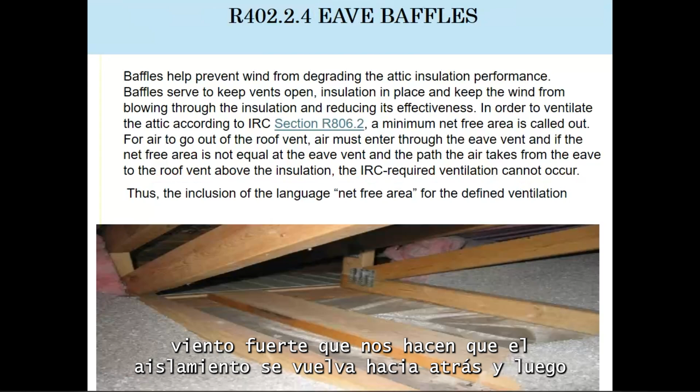Eave baffles are important. This is a real picture. The other thing about this picture that's pretty alarming is it's a class 1 vapor barrier on the ceiling, polyethylene. What do you see beaded up on the polyethylene? Can't say it, but you can see it. So the eave baffles stop the wind washing coming up through this soffit vent. You get these windy days, these high wind events like we're getting, it blows the insulation back, and then we get the big icicles.

Wood frame walls - so an attic knee wall is a wood frame wall. It's got to meet the intent of the prescriptive code or whatever you did in that model. Whatever you told that wall assembly had to be, it's got to be it. And what does that mean? Air barrier on the unconditioned side. So you can't have a truss that's separating conditioned from unconditioned space, you can't have a knee wall separating conditioned from unconditioned space unless there's an air barrier on the outside.

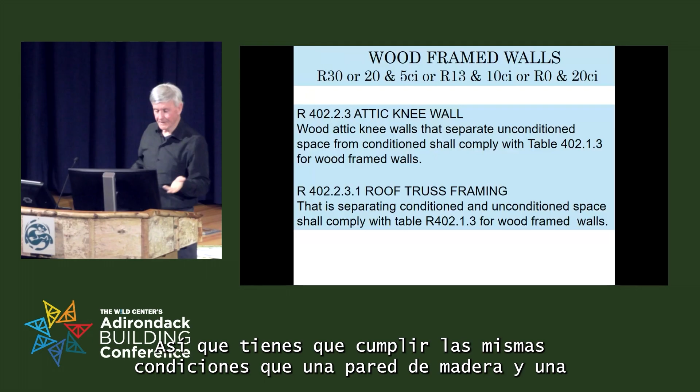How does that insulation work again? When you test it in a lab, it's hermetically sealed on all 6 sides. They just measure the temperature, how quick it moves through the assembly, and they do it. If you don't have an air barrier on the other side, you just lost all that insulation R factor. So you got to meet the same conditions on a wood frame wall and an attic knee wall, and you have to do it on the wood truss as well.

I said earlier that most of our air leakage does come in from the garage or underneath our decks down low, but the simple physics is, and this is the second law of thermodynamics, warm air goes up. So the thought process in the really good weatherization crews is, if you stop it at the top, you put a real robust air barrier in, nothing's going to come in at the bottom. One air in equals one air out. If one air can't go out, one air is not going to come in. That's a simple law of physics.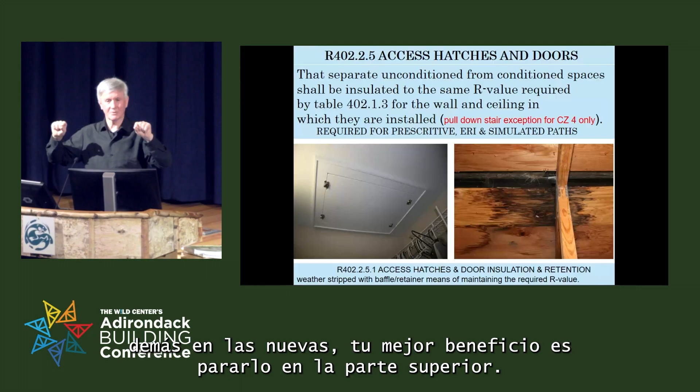Stop it at the top. So when you do these existing homes, or in the new homes, your best benefit is stop it at the top, then go to the basement, and then do your sidewalls last.

So the attic hatches and doors in the attic spaces are treated. I would say that's probably the most important door you have in your house. You might as well say it's as important as your front door. And when you just drop a sheetrock into a framed assembly and throw fiberglass insulation on top, would you allow that to be your front door? Absolutely not. You want to go into some of these older houses and look directly above where that attic hatch is, that's what we see.

The air is leaking out. Warm air is leaking out. Warm air holds more moisture than cold air, right? So it's taking warm, moist air, hitting the underside of the ridge, and you either see roof nails that are starting to rust or dripping, or you see this where it's very obvious what's happening.

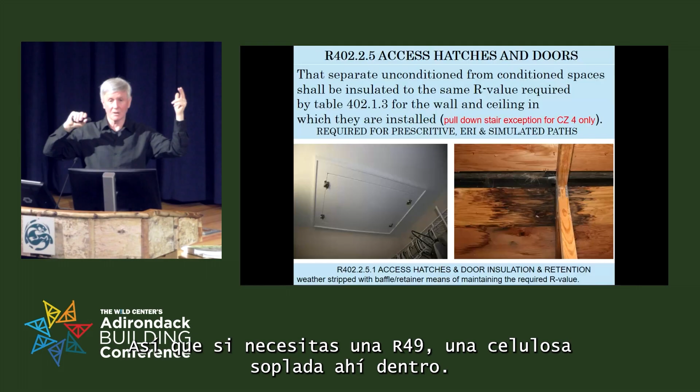So in this case, you can buy these assemblies. We just take double hung window hardware, put it in, put rigid foam on top of it. Now we're actually putting it up higher. You've got to have your retention around it. So if you need an R49 with blown cellulose in there, if you want the prescriptive path, your retention around those attic scuttles has to be this high.

You gotta take that 17 to 21 inches of cellulose or whatever it is. And those holes aren't made just for code officers, they're made for firemen and everyone else to go up through it. You don't have to go up into the attic, but you have to lift that attic scuttle, slide it over, and they have to put little rulers around every 300 square feet so you get to see the insulation level. You don't have to go and measure it, they have to do that.

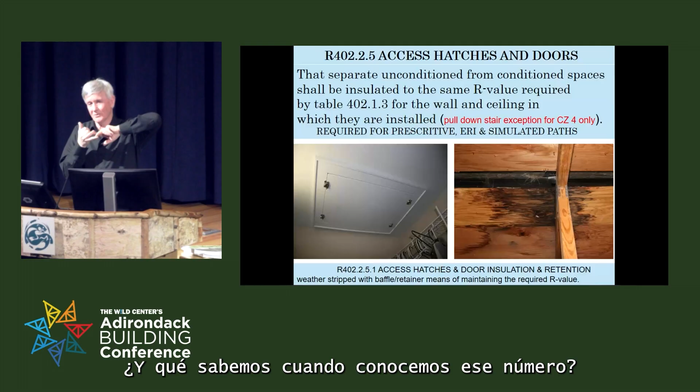And then they have to sign a certificate that has to be posted in the mechanical room that says, I blew 30 bags of 3.5 density cellulose into that attic. And what do we know when we know that number? What's it tell us? 30 bags has a certain coverage. So they have to say that and sign it, physically sign it. Either the builder or the guy who did it has to say, I did that, here's how much cellulose I put in that attic. Because I can't tell you how many times we go up in that attic and everything's perfect, then you walk down a couple truss bays and all of a sudden it starts to diminish.

So they're telling you, and they also have to give you the rated value when it's settled. There's no more, in the old days and after the 70s, putting your thumbs out like a garden hose and fluffing up the cellulose. Can't do that anymore, because we have to give the settled R-value, and it has to meet the intent of what you guys did on your planning review. It's got to say it.

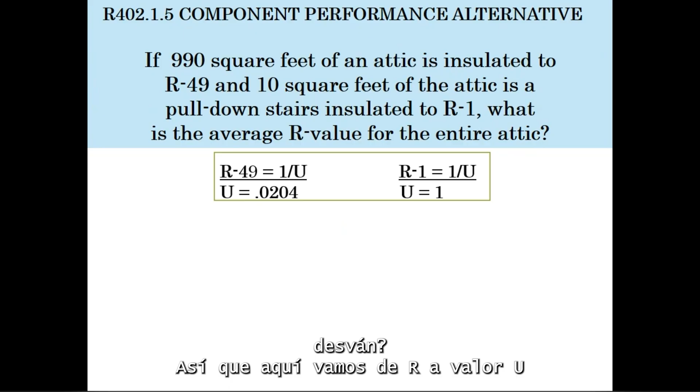Here's an example, just component performance alternative. If you have 990 square feet of an attic insulated to R49, and 10 square feet of it, that's a pull-down stairs size, insulated to R1, which is giving it a lot of credit, what is the average R-value for the entire attic? So right here, we're just going R-value to U-value, just doing the inverse. Go.

And you know the first time somebody goes up there, that fiberglass on it was glued, stuck on, taped on, whatever, it doesn't make it back down the second time, right? And the guys who are doing the caulk around it, because the code says you got to seal it, once you break that caulk, it's gone. The homeowner's not going to put it back. The IT guy's not going to put it back. The heating guy's not going to put it back.

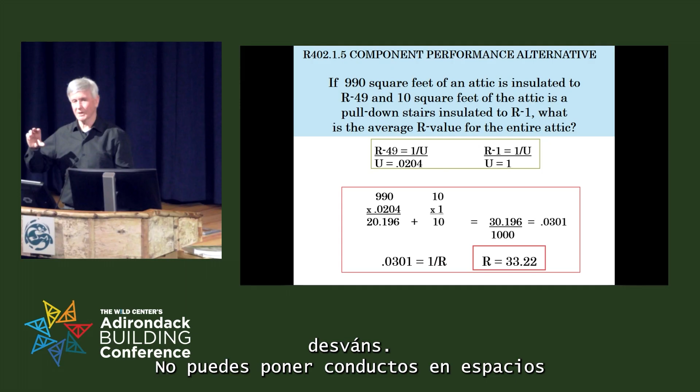And oh yeah, by the way, the heating guy shouldn't have to go in the attic anymore, because guess what? You're not allowed to put ductwork in the attics anymore. You can't put ductwork in unconditioned space unless there's rules, and they're very, very specific. I'm going to go through that in a minute, but hold that thought. No more ductwork in the attic space.

2 minutes. Stop at 11:30? Yes, oh, I'm going to hurry up then. Vapor retardants, Art's going to cover that.

I want to show you this one real quick. That was a five alarm fire. An $800,000 house, just had $72,000 worth of roof on it and $30,000 of insulation. Got a fire? Moisture.

Fireman came in after another call, had soot all over the boots, walked over the white carpet. One guy had an IR camera, heat sensing camera. There's no heat up there, it's not a fire. So our move was over on the right, cut it open, see what happened.

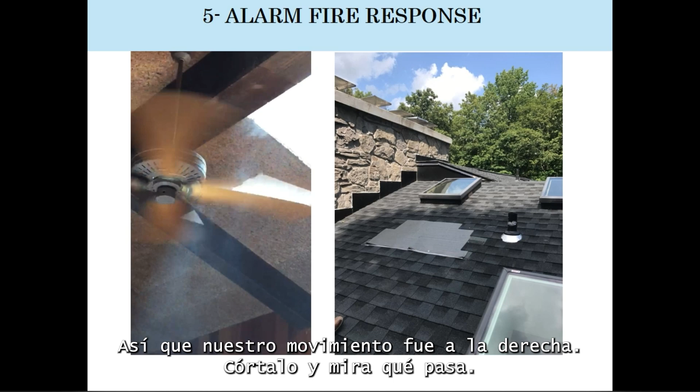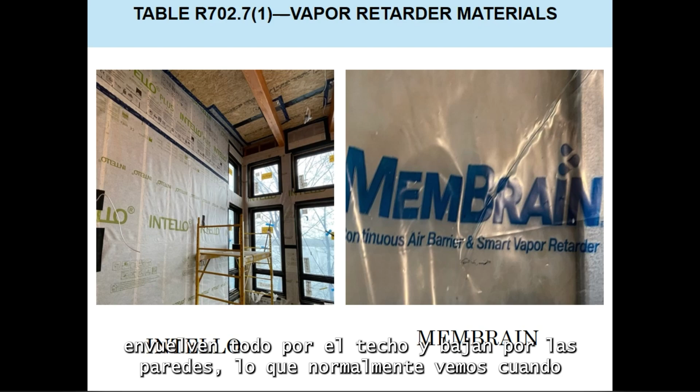Here's some of the smart vapor barriers. CertainTeed's made them for 20 years now. The MemBrain is called Intello. All this stuff is on the market, readily available right now. Most of the guys in Passive House wrap it all the way up and around the ceiling and back down the walls. That's not what we usually see when we're out looking at stuff, right? This one was approved for drywall on the left.

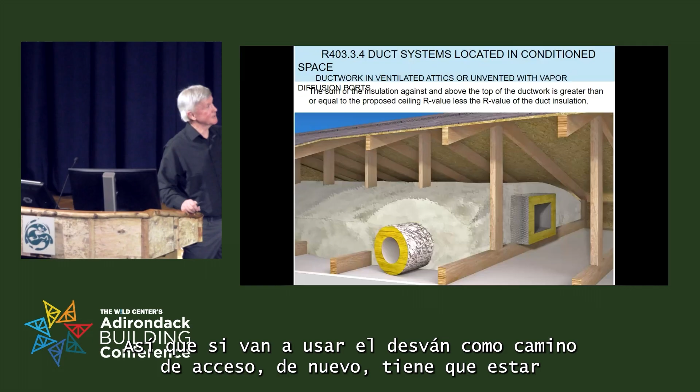So if they're going to use the attic space as a chaseway again, it's got to be buried in the insulation. The sum of the insulation against and above the top of the ductwork is greater than or equal to the proposed ceiling R value. And subtract the R8 off of this duct because it's bigger than 3 inches. It's only got to be R6 if it's 3 inches or less, right?

So it's got to be buried like this, but what else do you have to do? You got to test it. You got to test it with a duct blaster. And now you're not just testing total leakage. Total leakage means you set up - I showed you what the duct blaster looked like. You're only blowing 25 pascals into it, and you're measuring the leakage that's coming out.

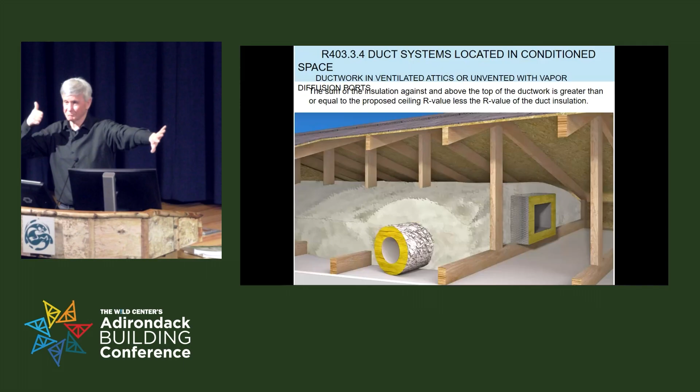You put the ducts in the attic like this, you've got to do total duct leakage to the exterior. That means your code officers have to set up a blower door, pressurize the house to 25 pascals. That's a big thing to do, trust me. Then you've got to cover every duct in the house and seal it, seal up all the ducts, and you're blowing 25 pascals. It's not an easy thing to do, I'm telling you. Then you've got to measure the leakage to outside, and it can't be more than 1.5 CFM per 100 square foot of conditioned space. This is how we had to fix it.

You don't want to be that guy. Builders in the room, you do not want to be these people cutting holes in someone's ceilings, going up, trying to find leakage in the ducts to pass. You don't want to be tracing around the attics. Trust me, you don't want to do that.

So what the code world is saying out loud: get all your ducts inside conditioned space. Don't put them in the attic, or you've got to do that test. And even though they're in conditioned space, you still have to test them. This is the simple stuff about 3/4 inch pipe, you've got to have the insulation.

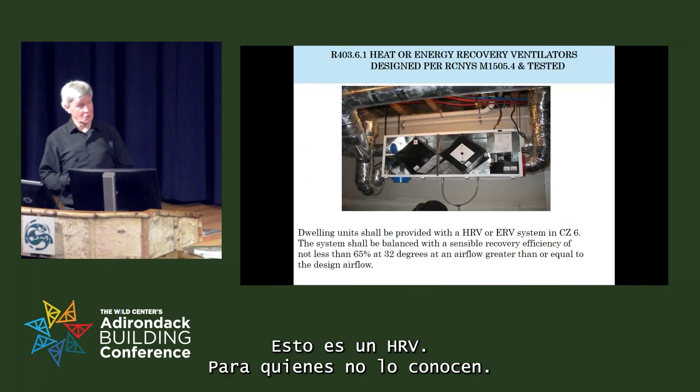This is an HRV for those of you familiar with it, it's what they look like. The airstream never crosses. We just had a big job out in Colorado where someone said, I can't do that because I don't want to mix the air. They never mix, they never cross. They're going through a filtration system, which can be all the way up to a MERV 13, which means we're actually taking 2.5 microns of particulate matter out of the air. So if the smoke comes again, they do have filters in them.

Building Excellence Project, right? So third-party testing, performance testing, finds these things before they become big problems.

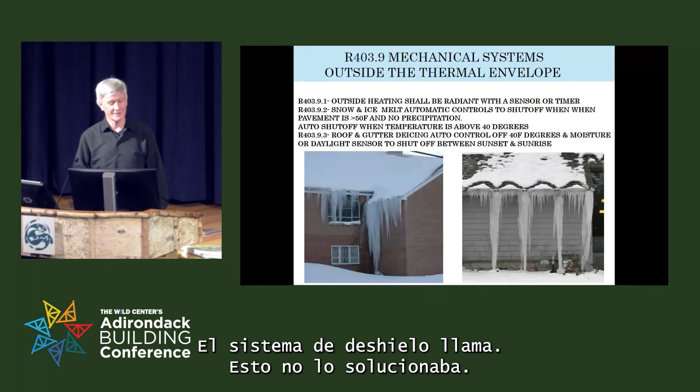You've got mechanical systems outside the thermal envelope. These are real pictures, I can't make them up, right? The snow melt system caused this, didn't solve it, it calls it. So you need controls on it, and those controls have to meet that. Very robust.

Simulated, I think I covered that earlier, but here you go. Dwelling units with one or more fuel-burning appliances, right? Space heating, cooling, mechanical ventilation, and water heating only, that's all it measures for the cost. And if you've got a fossil fuel burning plant in that house, it's got to be 20% better. If it's all electric, it only has to be 15% energy reduction. And if you're over 5,000 square feet, you're back up to the 20% energy reduction, right?

Energy rating index, talk to those guys in the back of the room, or you can come on down and talk to Josh and I. We do a ton of these. What it looks like: a house that hits a HERS 100 is how built to code. A house that has a HERS index or an ERI of 0 is zero energy. Up here in New York State, we've got to be in climate zone 5 and 6, 54 or 53. If you want that 45L, that hopefully does come back someday, all you've got to do is hit 50% better than code. You get a $2,000 incentive.

Oh, I should probably end on this one. How many people go into a house as a code official and see the mandatory certificate in the mechanical room? Anyone? I got 1, 2, 3. Do they list duct leakage test on it or air leakage test? Sometimes that, yeah. So right now, it's not just the air leakage test, it's the duct leakage test and mechanical ventilation, those have to be on those stickers now. No, the stickers aren't out yet. You can get them from ICC, but they're not out yet.